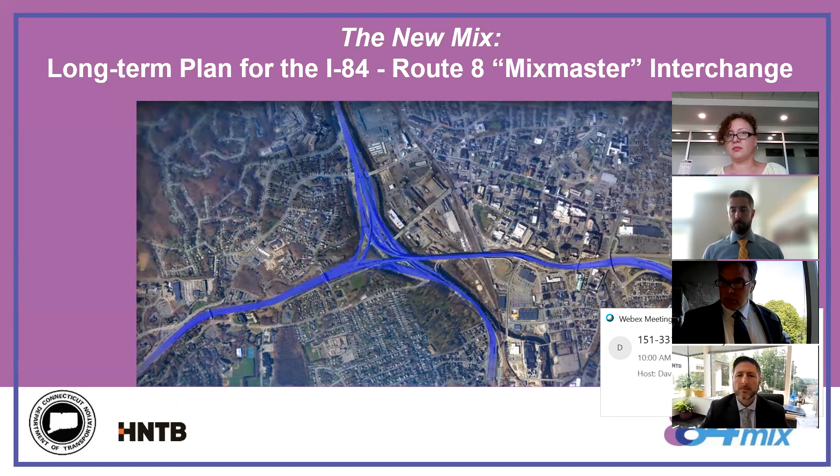Let me just see who we've got. So we have First Selectman Moan, First Selectman Assard, we have Mayor Dunn, I believe, and we only had maybes from Naugatuck, Derby, and Ansonia, but they never confirmed. Okay, well, if the DOT's ready, we're ready. Okay, we are.

Good morning, everybody. This is John Dean from the Connecticut DOT. Thank you so much for taking the time this morning, and thank you, Mayor O'Leary, and to the NVCOG staff for setting up this special meeting. We appreciate your time, and we know that you guys are very busy. So we're here today to tell you about the New Mix, which is what we're calling our long-term plan for the eventual replacement of the I-84 Route 8 Mixmaster. We have a brief presentation for you, and then we'll have time for questions and answers afterwards. But if anything comes up that you'd like to jump in and ask, feel free.

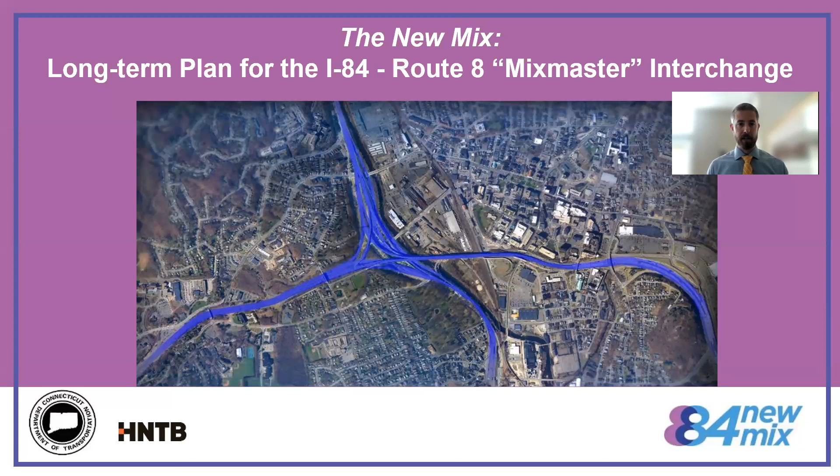Dan, if you could go to the next slide, please. So the agenda briefly of today's meeting: we'll tell you a little bit about our team, the history of the Mixmaster, the New Mix program, our plans for public involvement, and then, as I mentioned, we'll get into the questions afterwards. Next slide, please.

From the Connecticut DOT side, Mike Calabrese is our division chief of highway design, Scott Roberts is the project manager for this project — unfortunately they were both unable to join us this morning. My name is John Dean, as I mentioned, I am the project engineer. From the HNTB side, Jake Argiro is the project manager, David Schweitzer is deputy project manager, Anna Mariotti is the public involvement coordinator, and Chris Fagan, who is not on the line at the moment, is our project engineer.

Next slide, please. Okay, so just to give you a brief overview of the timeline of this study: we actually started back in 2017, and we started doing some public outreach. We met with the mayor's office and NVCOG staff at that time. We started meeting with some of the stakeholders in the area as well, such as Chamber of Commerce, the hospitals. And shortly after we began this study in earnest, we got what we're terming here a fiscal warning from our management.

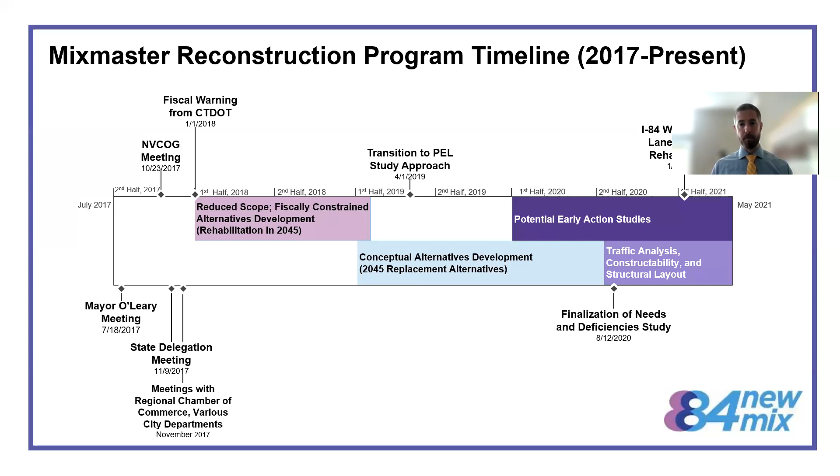So that's the history of this study. But for a little more about the history of the Mixmaster itself, I'll turn it over to David Schweitzer. Thank you, John. The Mixmaster is a prominent feature within the city.

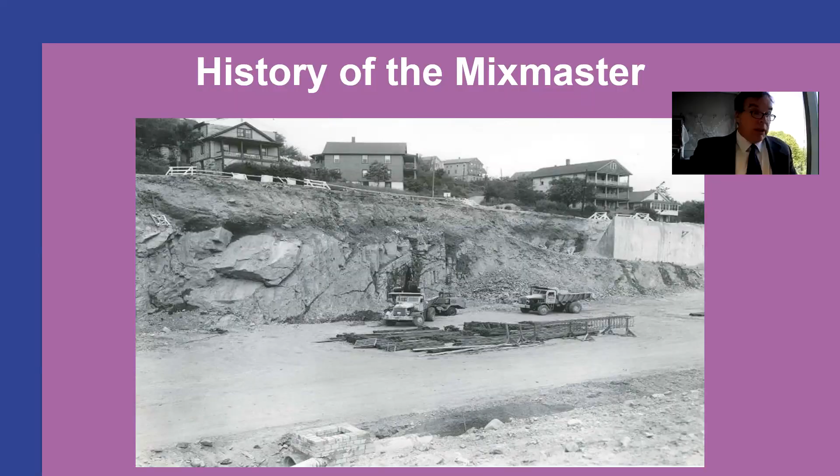Both roadways have multiple service interchanges within our area. A system interchange refers to a ramp that goes between I-84 and Route 8 or vice versa. A service interchange is one that comes from one of these main lines down to the local level or back up.

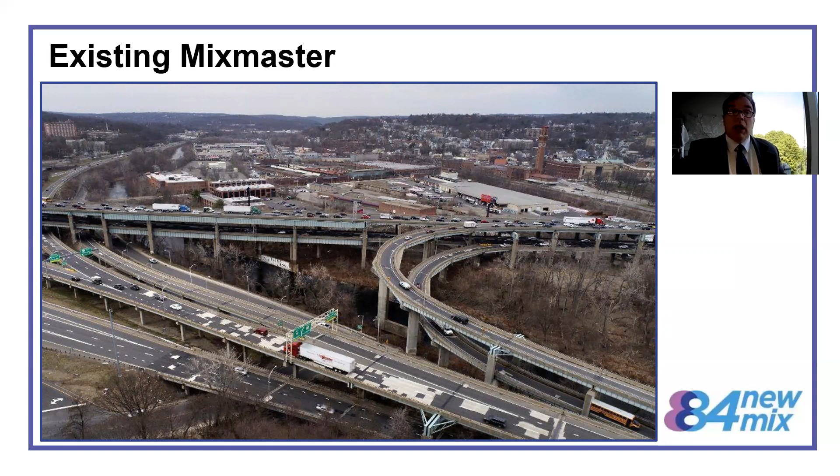It took almost 20 years to build the interchange here, requiring a number of projects. Within this area, there are over 60 structures.

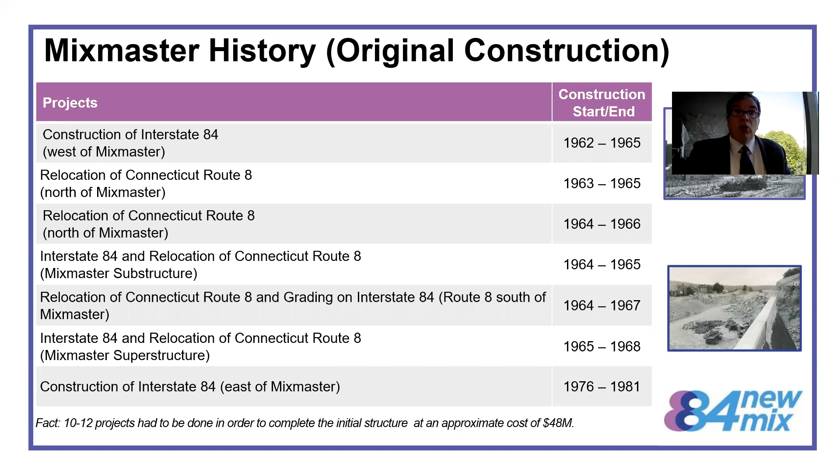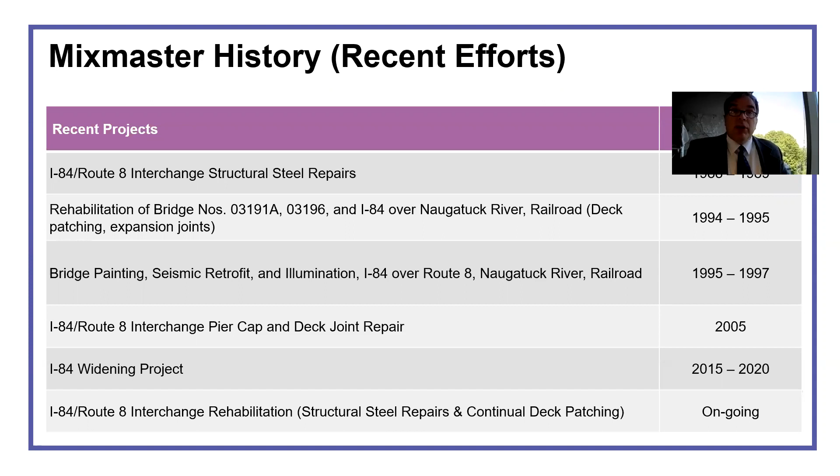Over the years since completion, there have been a number of projects for maintenance, repairs, seismic retrofits, painting, and illumination. Most recently, we completed the widening project on the east end, where I-84 now has 3 through lanes between Waterbury all the way to Hartford.

Right now we're into the current rehab project. As John mentioned, we're looking to add 20 to 25 years of service life to the interchange. But there's a lot going on with this.

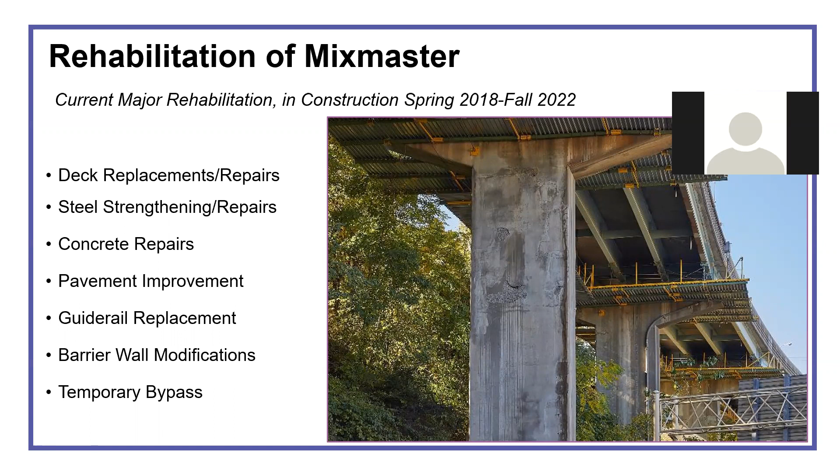We're replacing the decks on both Route 8 southbound and northbound. With the other 8 bridges within the interchange, including both I-84 structures, we're doing a lot of deck repairs and steel strengthening. We're also repairing the substructures on these as well.

We've completed our data collection and our needs and deficiency analysis report. When this interchange was built, it was state of the art and innovative, with a smaller footprint, narrower shoulders, and stacked structures.

There were a lot of cost savings because we used left-hand on and off ramps, avoiding a lot of flyovers or fly-unders where ramps come up on the right side. It was also innovative for the access it provided to the city with all the service interchanges. But things have changed.

Oh, I'm sorry, Anna, can you go back, please? I'm sorry. Thank you. But things have changed.

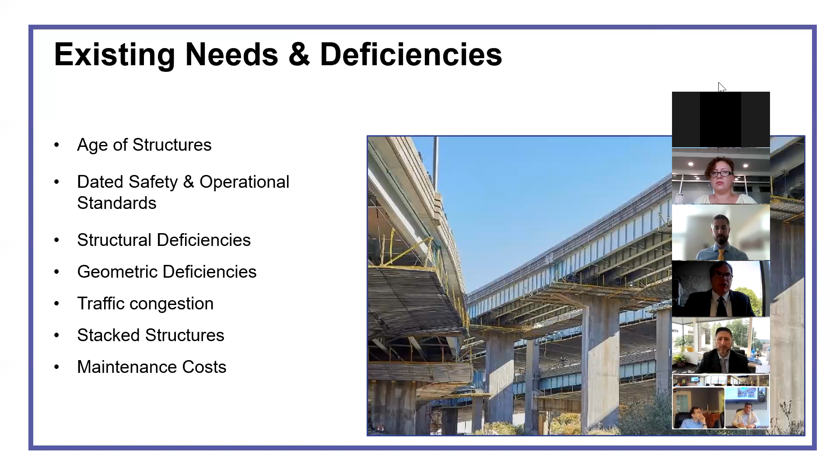There are changes to the way we design and build roads today. We have new and improved guidelines for safety, design, and operations. We know what's safer, what requires less maintenance, and what helps reduce traffic congestion. Also, since this opened, traffic volumes have increased quite a bit more than anticipated, and trucks have gotten bigger and transport heavier loads, creating more wear and tear on these structures.

By the year 2045, these 60 structures will be 75 to 80 years old. They have some older details which may be a bit fatigue prone, and we also have deck end joints that are consistently being reconstructed. On the geometric side, we have limited shoulder widths.

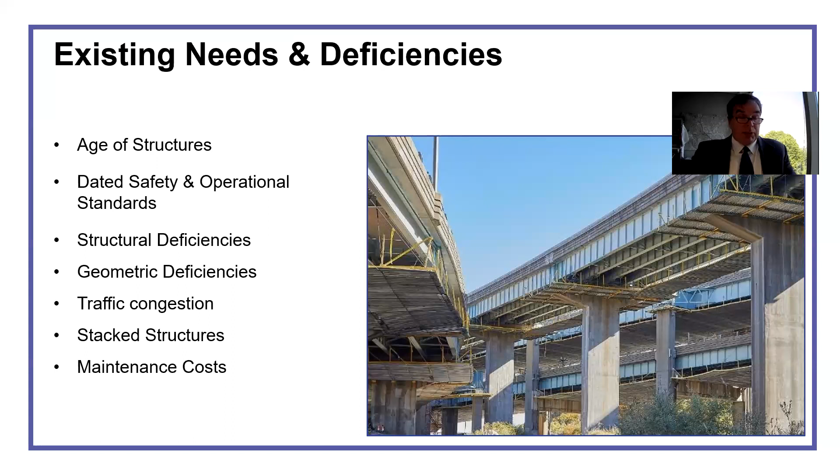We have a lot of left-hand entrances and exits within this interchange, tight spacing on our interchanges both between system and service interchanges, and some tight horizontal geometry with some of these ramps. This is leading to a bunch of traffic congestion.

Between these deficiencies and the traffic congestion, this leads to a higher crash rate than normal in this area. There are a lot of merges, diverges, and weaves, leading to a lot of decisions for drivers and a lot of speed differentials between vehicles. This is leading to the higher crash rate.

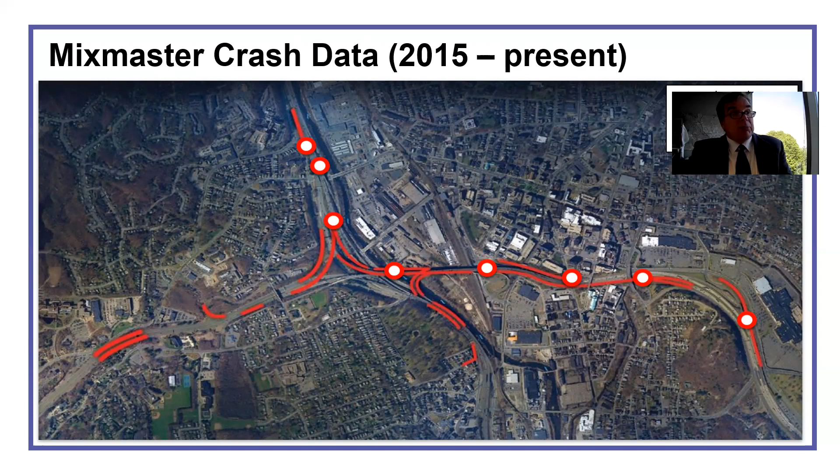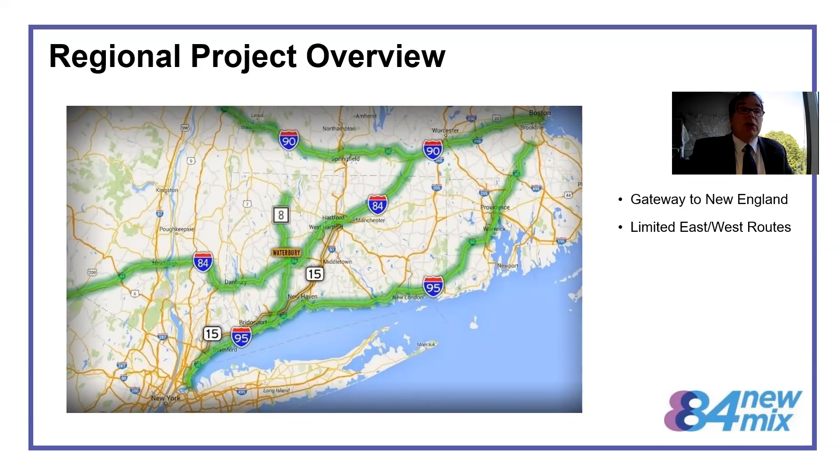Now I'm going to turn it over to Jake to walk us through what we're doing with the new mix program. Great, thank you, David. So what is the new mix program? The new mix program is a long-term planning study that looks to find a solution as to how to reconstruct or replace the interchange as it's reaching the end of its lifespan.

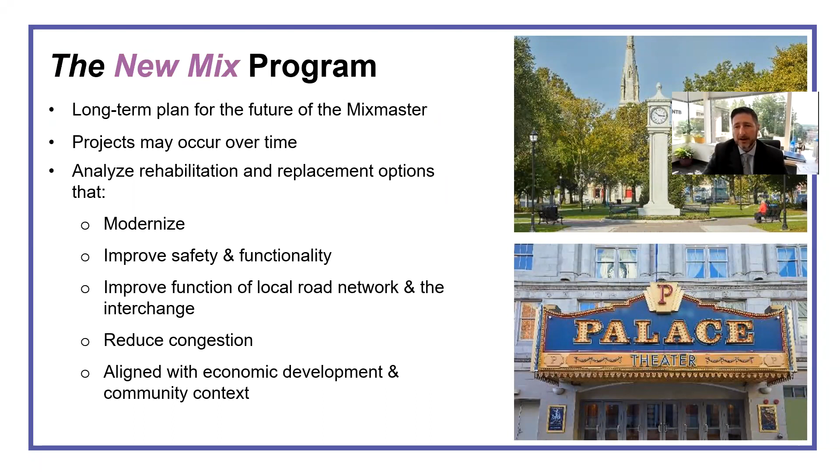It's anticipated that this will be phased over time, and it will modernize, improve safety, the functionality, and reduce congestion, and align the project with the city's economic and development and community goals.

Now, what are we looking at? Our study area shown here extends beyond the interchange itself in order to examine a wide range of design options. We're taking into consideration the area, not only including the entrance and exit limits of the interchange, but also the major arterials, the intersections, those local intersections, as well as cultural and historic resources. We're also taking a deeper dive into the local road functionality.

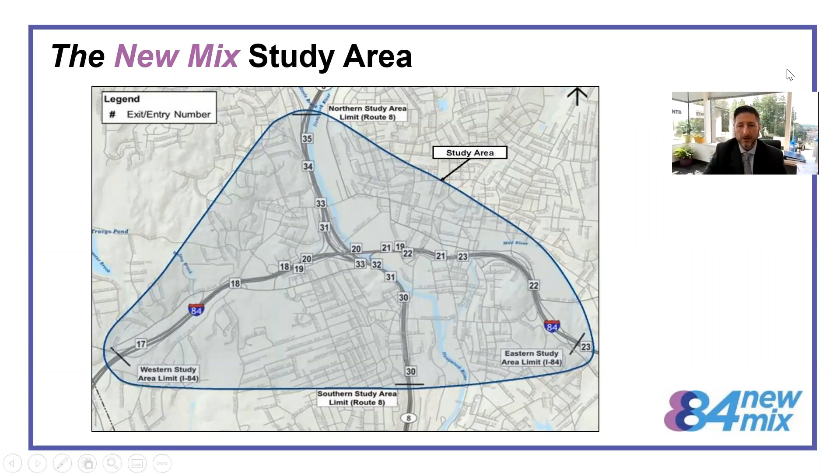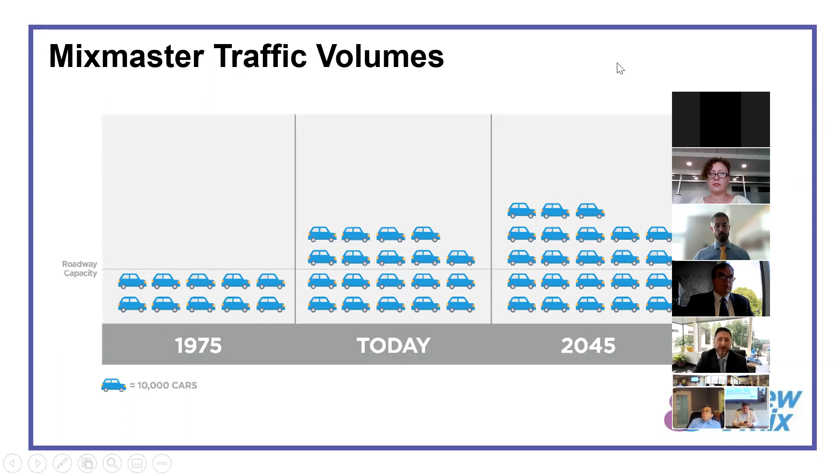As David alluded to earlier, the traffic volumes have gone up substantially since it was designed and constructed back in the 60s. It was designed to accommodate approximately 100,000 motor vehicle trips per day, using a predicted volume for 1975. Now we're at 190,000 motor vehicle trips per day along this entire interchange each day. Our projection by 2045 estimates that to be at 225,000 motor vehicle trips per day. Combined with the operational deficiencies, this creates less than ideal conditions, as David talked about a couple of slides earlier.

One of the very interesting things we found through our study is that approximately 35% of the motor vehicles entering and exiting the interchange within that study area are people jumping on and jumping off the interchange just to get from one side of the city to the other.

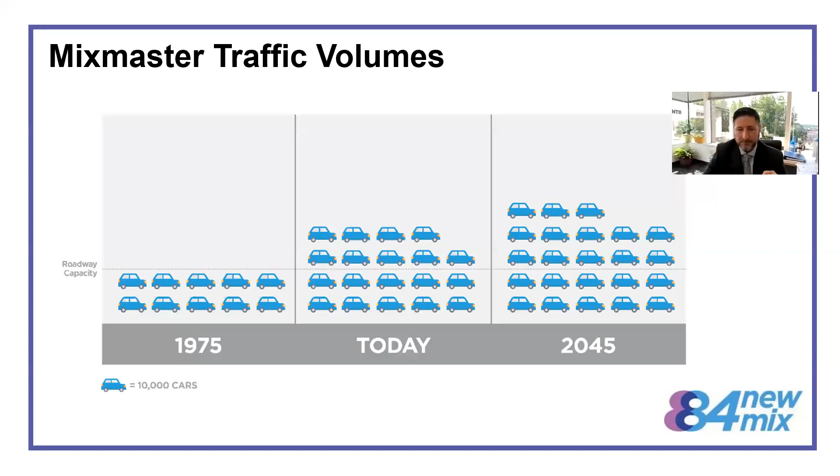John talked earlier about the investigation of what the next rehabilitation would be, and through our evaluation, that would be taking place in approximately 20 to 25 years. We explored the complete replacement of the stacked bridges on the I-84 portion of the interchange because the decks would be nearing the end of their lifespan. So the focus of the rehabilitation was not to replace the interchange in its entirety, but to look at a major rehab focusing on the I-84 structures.

What it ended up looking like was replacement of the decks would require approximately a 16-hour duration of traffic impacts on a daily basis over a 4-year period of time. This would have major impacts to the city and the overall region, as those impacts would be very substantial. The cost was estimated to be approximately $1 billion in today's dollars, $2 billion in future dollars.

So overall, the department decided to continue to look at other options for reconstruction in the future. Because remember, at the end of the day, we would have ended up with new concrete decks sitting on top of 80-year-old substructure and structural steel, and it would not have improved the conditions of the substandard shoulders, left-hand interchanges, narrow shoulders, and the modern safety standards that we see today.

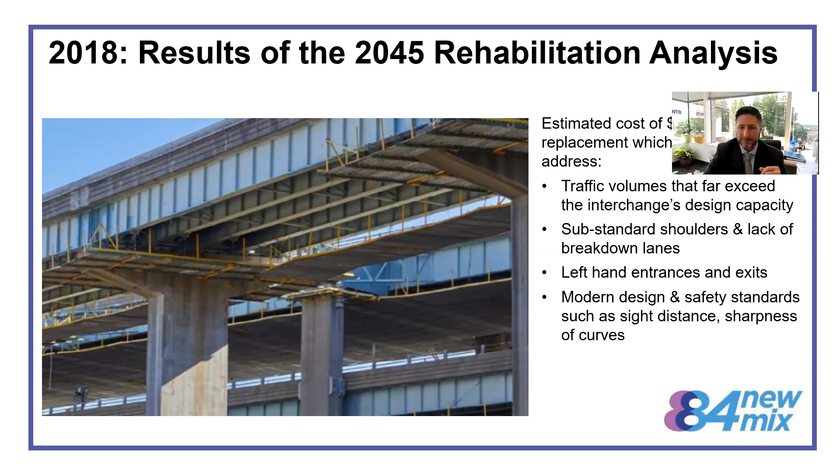So what's our plan? We're in the very early stages of planning that long-term, complicated reconstruction project. We're looking at various replacement and rehabilitation options, and all options include phasing the overall large project into smaller, more manageable projects. Why are we looking at that?

That phased project approach is more manageable. It allows the preparation and distribution of funding for other projects within the state. It's anticipated to have less intense traffic impacts by constructing improvements to reduce traffic on the interchange. And John spoke earlier about opportunities for the area to achieve some early wins via local road improvements and even enhancements on the interstate itself.

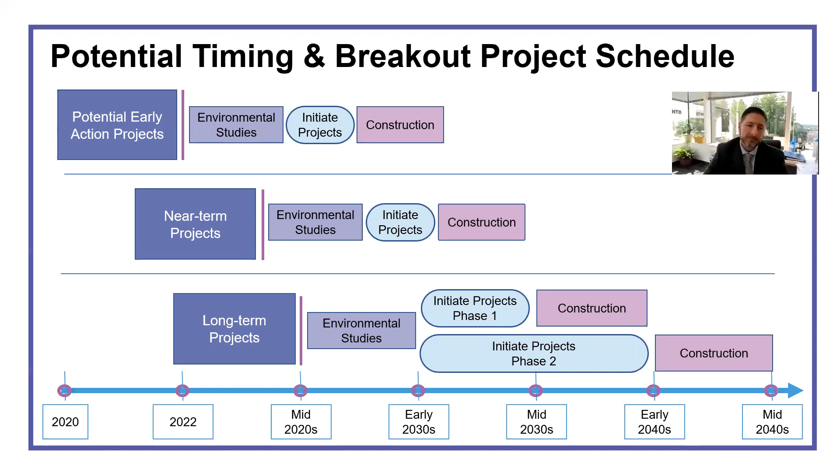So what are the types of projects we're talking about? The proposed early action projects are generally focusing on high impact, local road and intersection improvements that'll help reduce those volumes jumping on and off the interchange to get across town.

Then we look at opportunities for near-term projects. Those are the projects more located towards the outer legs of the interchange that can be initiated before the core of the interchange needs to be reconstructed.

That long-term project, the core of the interchange, focuses on the 84, the Route 8 interstate roads, and all of the system connections that are required to be connected and replaced at that same time. We're looking at that as the long-term, more substantial, 20 years or beyond form of the crux of the project.

So with that, I'm going to turn it over to Anna to talk about our approach to the public involvement.

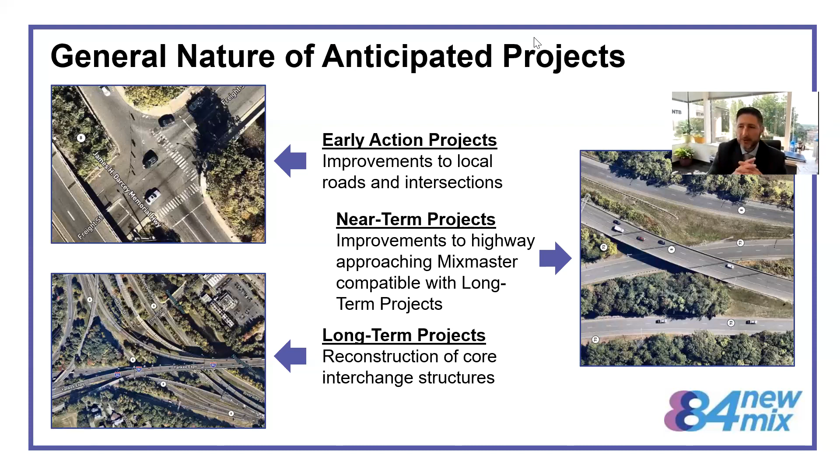In order to reach effectively a wide range of people, you have to be accommodating. So we are going to have various ways in which the public can learn about the project, ask questions, provide input, and stay informed. These are scaled to people with different time constraints.